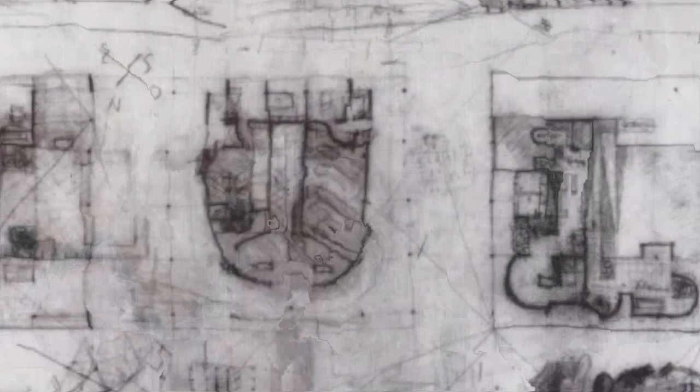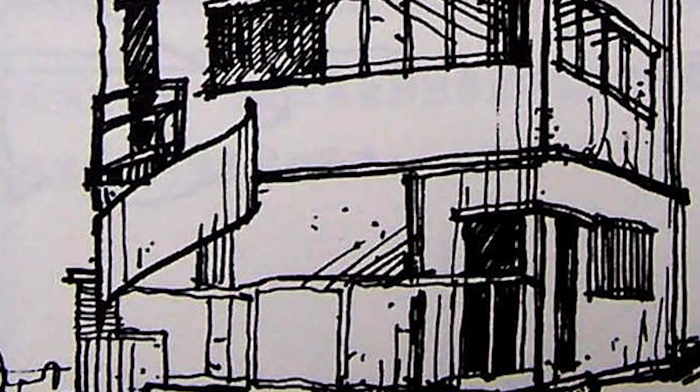And even the designing process was so weird. In September of 1928, a few sketches appeared inspired by his previous work, like the external stair of the Ozenfant Atelier house built in 1922, the fireplace alcove in La Petite Maison built in 1923, and the gentle curved wall of Villa La Roche-Jeanneret. And in November of 1928, some sketches appeared showing how things were looking so iffy, and Le Corbusier was not even in the office because he was too busy attending events and finishing his book.

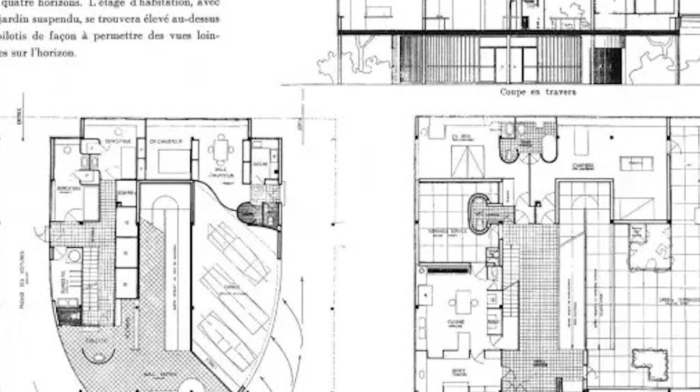After the release of his book in 1929 and the beginning of construction of Villa Savoye, the building looked so different from the Villa Savoye we know today. 1929 was the year when Le Corbusier's career took off, so he was traveling a lot, giving lectures, celebrating the release of his book, and dreaming about being the world savior with his disastrous urban planning ideas.

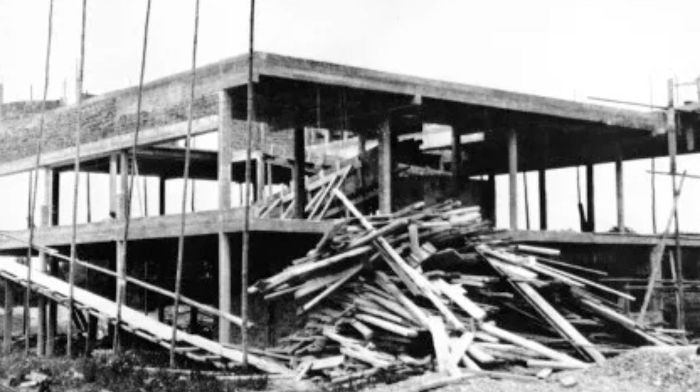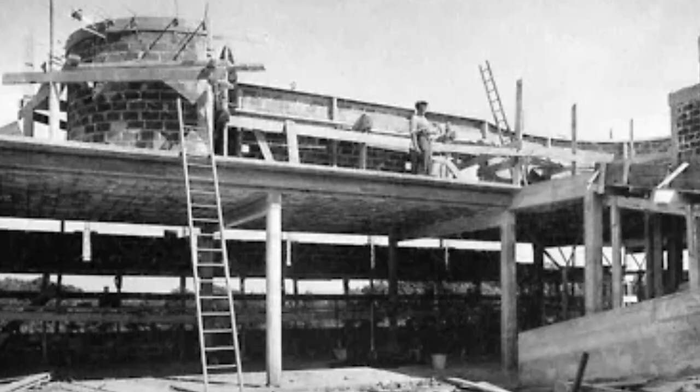Meanwhile, the Savoyes were so irritated and dissatisfied with the outcome of the design and with him not being reachable. So after threatening to cut the cash, they finally caught his attention, and Le Corbusier accepted to make some design changes even after the construction had begun. So in 1930, Corbusier released his book, Volume 2, and this is how Villa Savoye looked.

It is a big deal to change the design when the project is being created, and it has produced a wide range of results. The first design would have cost the Savoyes about 800,000 francs, but that was far too much for them, so after some complicated changes to the design, the new price was about 480,000 francs, but the house ended up costing more than 500,000, and this left out several big items, such as the landscaping and the servants' lodge.

And even before it was finished in 1931, the Savoyes wrote long letters to Le Corbusier reciting some disastrous technical failings, such as a broken pane and the slat coming out of the window in the son's room. The terrace side window of the boudoir, the upper part of the ramp, and the garage leaked so much that they were flooded. The rain made an infernal racket on the window above the washbowl, which stopped them from sleeping in bad weather, and the ceiling was completely soaked. So steps needed to be taken urgently before the painting was finished.

And Madame Savoye's letters show that these issues persisted long after the project was finished. She even threatened that she would take recourse to legal actions. And even the contractor claimed to have warned Le Corbusier that such a design would cause such problems, but he refused to take responsibility, and all these problems resulted in the house feeling cold and damp.

Because of the constant changes to the design even after the construction had begun, Villa Savoye reveals some awkwardly placed spaces and objects. The redesign has 2 toilets placed immediately above where the wash basin must have been, which led to the existence of this draining pipe in the middle of the hall because it would have been too expensive and time-consuming to shift the draining pipe. An isolated stove in the large sun lounge, and that solid construction on the bathroom floor which could have been used as a large shelf if it wasn't shaped like that.

So we can all agree that the Villa Savoye was uninhabitable, and it was a mistake to use such a house as a prototype, and allowing your clients to suffer the most as a result of your experiments is disgusting and psychopathic. And despite all that, someone for some reason decided that this building should be famous, and in 1964 it was listed as a public building, and since then it has undergone 3 series of restorations, and Villa Savoye is now a preferred destination for architects from all over the world for inspiration for their new projects.